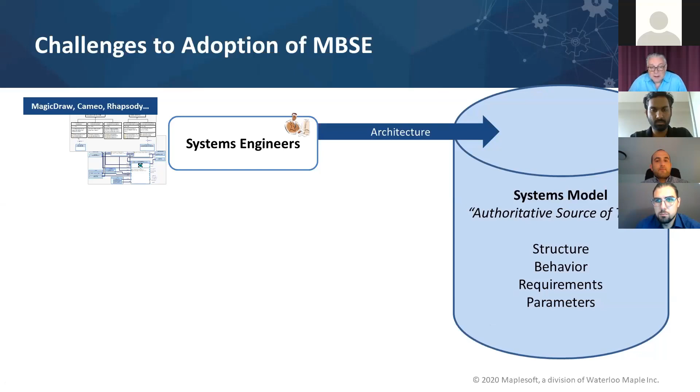And typically, this would be around the systems model, which would be considered either the single source of truth, or the authoritative source of truth, which defines what the goals are of the system design and operation. So the systems engineers would be the ones creating the systems model.

And then many different stakeholders, not just design engineers, but safety engineers, business process managers, all are involved in the project, and they need information from the systems model in order to do the work that they're doing.

And once they got that work, the results of that work has to be then transmitted back to the systems engineer, typically in a fairly ad hoc way.

It'll be emails, documents, spreadsheets, and so forth. And then it's down to the systems engineer to decode all that information, to populate the information back into the systems model. And this is where we're seeing a fair bit of friction.

It's a very human process, so there's a lot of misinterpretations or miscommunications. Errors start to creep in, and this ends up with a lot of time wasting rework or investigations, endless design reviews trying to address those problems.

And then this just sort of erodes not only the efficiency or the efficacy of the process, but also it erodes confidence in the process itself.

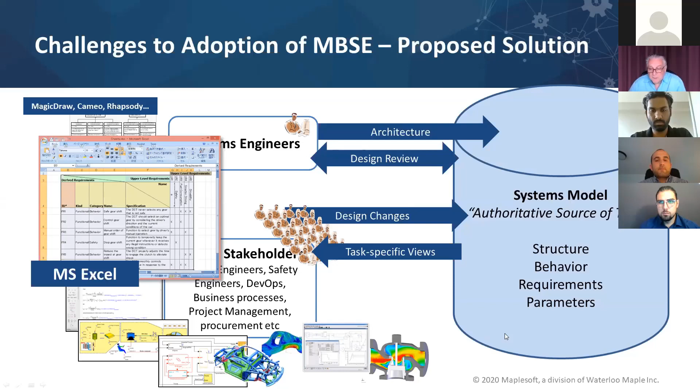And once any changes are discussed and agreed, then the engineer can simply authorize those changes into the main systems model. But this isn't just about facilitating the collaboration between the systems engineers and the stakeholders.

It also allows various different stakeholders to collaborate with each other through the systems model. And this is actually one of the sort of tasks we're going to be seeing here in the context of product line engineering, so variability management, as part of those tasks that can be done in collaboration through the Excel user interface. So that's really our driving motivation for developing MapleMBSE.

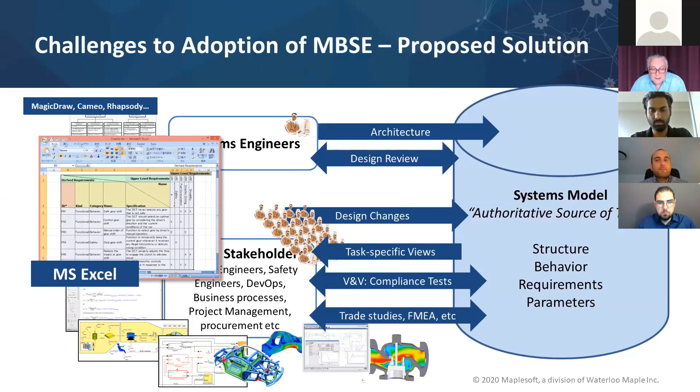Just to be clear, MapleMBSE provides an intuitive Excel user interface that allows you to enter and modify system information in an appropriate way.

But it also, at the back end, provides a very tightly integrated bidirectional synchronization between the systems model and the front end in Excel. So this is not about file import and export. This is truly using Excel as a user interface to the systems model.

It's highly customizable because you have many different tasks, and you'll see in this presentation one example of the tasks that MapleMBSE can be configured to perform. We currently are integrated with pretty much the standard systems engineering platforms, specifically Rhapsody from IBM, MagicDraw, Cameo Systems Modeler through Teamwork Cloud. And as of last week, we also support Capella.

So in a nutshell, what MapleMBSE is doing is facilitating the ability to collaborate across the enterprise through the systems model by making it easier to access that information and to enter information. This reduces friction between the systems engineering function and all other stakeholders, reducing errors, costs, and all that good stuff. More importantly, it helps increase confidence in the process and broadens engagement with all stakeholders through the systems model.

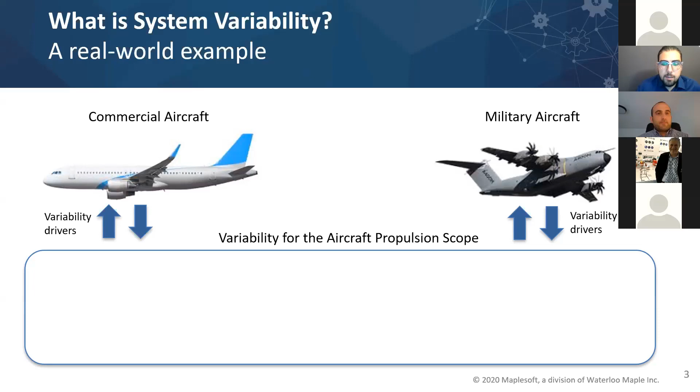If we take the example of a subsystem that can be reused between the two types of products, that can be the propulsion, we can see that the variability is driven by several aspects. For example, the installation of the tanks, whether the tanks are installed in the body of the airplane or in the wings, the type of tanks used, the amount of tanks used, but also the refueling method used to refuel the airplanes and the type of system that implements that.

The type of engine - you can imagine it's really different if you are performing a mission with a military operation scope versus a commercial scope, the engine will be different. Also, the performance of the engine will vary, and the propulsion technology used can also drive variability, among many other aspects. One example is the mileage range, but we can identify other drivers of variability too.

So the key question here is how to manage this system variability, and what is common, what must remain common, and what can be variable.

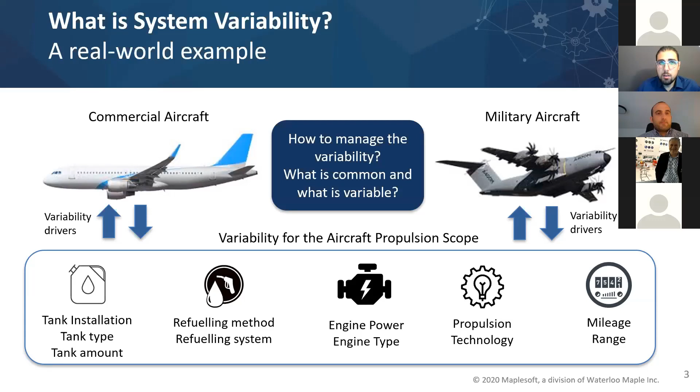If we move to the next slide, now we have the question: why is it important to manage variability? If we take an aerospace perspective, we can identify three main motivations. First is the complexity management aspect. As you can see, aircraft are really complex systems with a lot of interdependencies. Now imagine if you change one component, or add variability in one of these components with so many interdependencies - the impact of changes in your system can be huge. So it's important to understand what must remain common to avoid increasing complexity, and what can vary because it doesn't drastically impact the complexity of the system.

Second aspect is the reuse aspect.

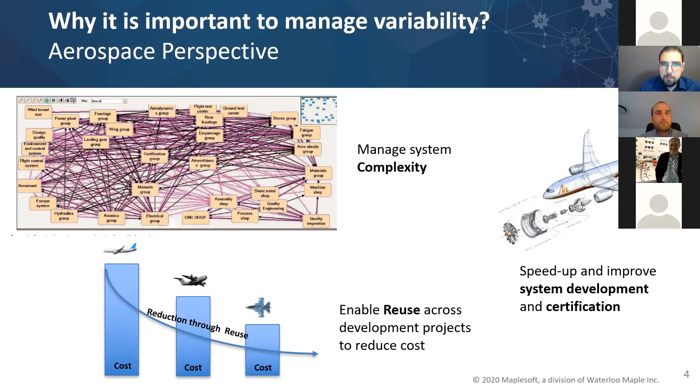As I mentioned before, aircraft manufacturers and other engineering companies aim at reusing as much as possible. Variability management enables the reuse of components, functions, and other engineering artifacts across different projects or programs. You will not only cut the non-recurring costs, but ultimately also the recurring cost, since you are taking advantage of economies of scale. Third, if you manage variability properly, you speed up and improve your system development, so you have a faster time to market, and at the same time decrease the time needed to achieve certification to authorize operation of the airplane in this case. These are just some of the key motivations to manage variability, but we can identify much more than that.

According to the standard, we can simplify the understanding of variability management using this visualization, the so-called four quadrants. On the upper part, from left to right, we have the domain engineering, and on the bottom, the application engineering. Domain engineering is where the variability is defined, created, and managed. Application engineering is where the features and variability are configured in order to generate several applications or single products derived from the platform. So domain engineering is always associated with the platform, where the variability is defined, and application engineering covers the single products derived by the platform.

Now, the focus of this presentation and demo is the left side, so we are going to cover domain and application engineering, specifically the features and configuration of features. For example, take this small example: if configuration 1 has, as you can see here, a commercial operation and a long range operation, I select these two features, and these two features along with the information regarding their variability are defined on this level. At the bottom, they are basically configured.

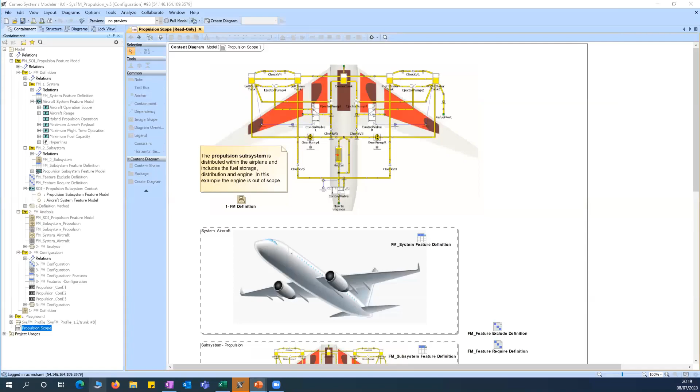It mainly highlights the definition of what methodology means, and clearly states that methodology is a set of processes, methods, tools, and the environment. We extend it here with the ontology and the modeling language, because we find these very crucial parts. It's most important that you take this big picture, and in the following slides we will dive into each one of these components.

With respect to the first part, I'm sure everybody has heard about process and knows what it means. But unfortunately, typical processes are normally historically extended with a lot of information, maybe with methods information or tools, getting so advanced that they are not really usable. From a SysPL, Systems Product Line perspective, here...

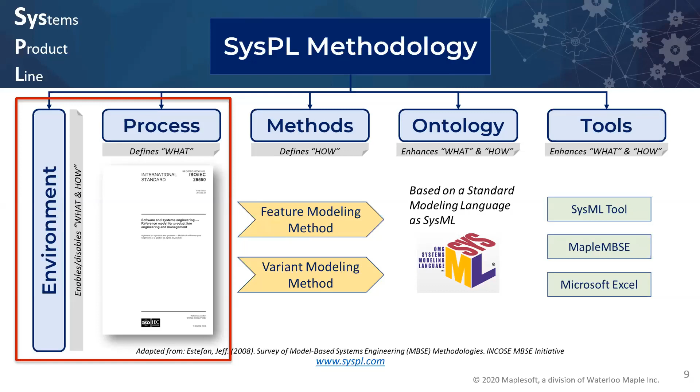If we move to the second part, which is the methods, here it's mainly about defining the how, exactly how you do it. If you meet your colleague or a competitor and you think, oh, you need to know how he did it, that's really the secret. Normally the methods part costs a lot, not only money, but a lot of time to find out how to do it best, how to do it the best way to achieve what's needed with respect to MBSE. The method part is also a very hard part, because it's very linked to the process. We need to look at what we do and then see how to do it from one side, and from the other side, it's very much related to the tool we use. It's also very much related to the ontology or to the modeling language we use.

For this scope, we focus on the feature modeling method, and as you see, it's a task, a collection of other tasks. And if we open the box and see what the subtasks are, it's going to start with...

The feature definition is the time when we start to define features. Here we don't say if it's in Excel or in Cameo, we just say exactly - we're going to show later in the demo how we can do it. We define the feature model elements, which just collect a set of features. Then we define the features of the system under system of interest, and mainly we define the feature relationships, which can be, in the second slide, all the dependencies between the features.

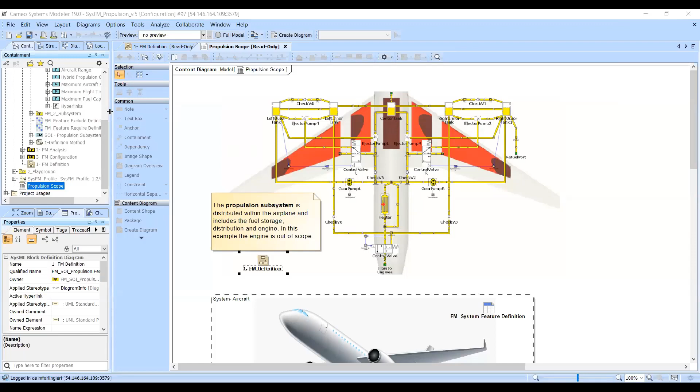So the example is an aircraft propulsion example. The propulsion subsystem for this example includes the fuel storage and distribution subsystem components, but it doesn't include the engine, because we are taking the perspective of the aircraft manufacturer and not of the suppliers.

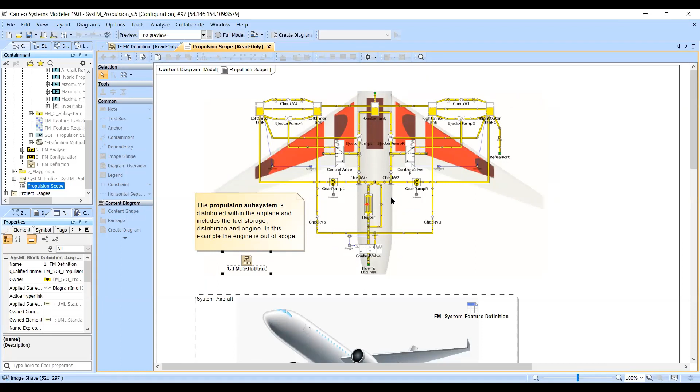Usually the engines are delivered by the suppliers. So when we define the variability for the propulsion, distributed this way as you can see in the airplane, we don't just look at the subsystem propulsion variability, but we need to get input from above, from the aircraft, because the variability at aircraft level is different than the variability at propulsion level. And also we need to get input variability from the components that are usually delivered by the suppliers.

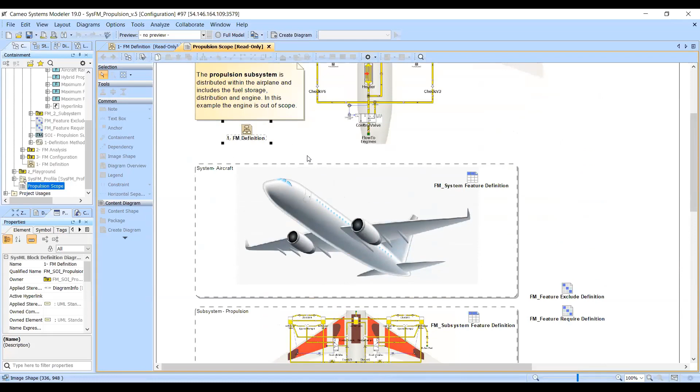For a matter of simplicity, we have identified two feature models for this context. This means that if I want to develop a propulsion subsystem with variability, I will have the features that are under the scope of the propulsion team, defined by the propulsion team. But I also need to consider features defined by other teams, in this case the aircraft team. The propulsion team defines its own features but also uses features from other teams. This approach and organization also enable collaboration between different teams when they define feature models.

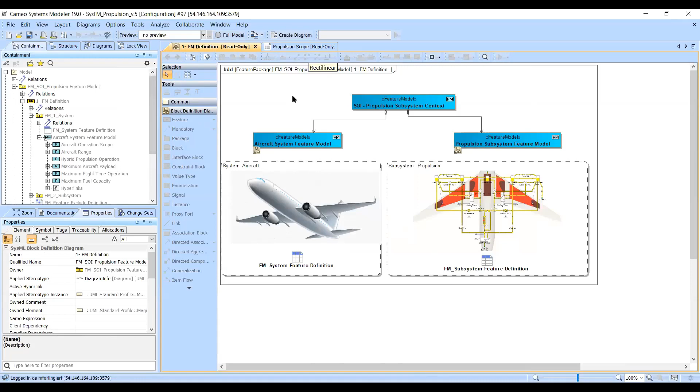So now, after introducing this content, I'm going to show you that some features have already been defined in Excel in the tool. And we have here, for example, the so-called variability tree or feature tree.

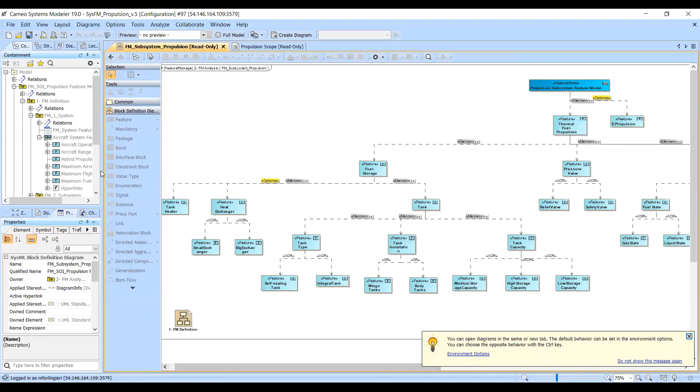As you can see, we have several features defined for the aircraft level: the aircraft range, the maximum fuel capacity, and so on. And then we have other features defined for the propulsion. The variability tree here is much more complex, with many more features. These are the features that have already been defined.

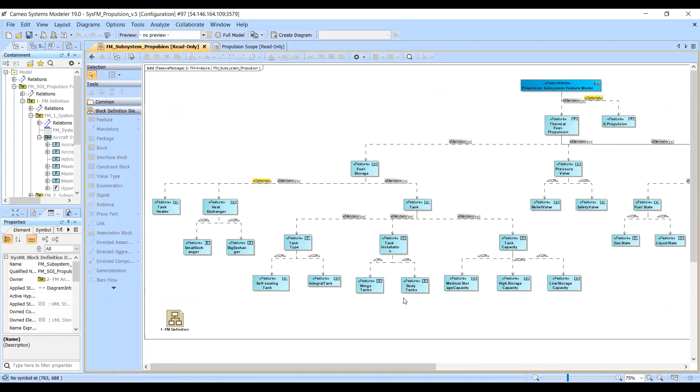So now I take the hat of a person who doesn't know anything about MBSE, but has full and deep knowledge of the system, in this case the propulsion system and the aircraft system. I'm going to go to my system feature hierarchy tab in Excel.

I'm going to add additional features to the features that have already been defined. As you see, these are exactly the features that you saw in Cameo. Now I'm going to define additional features.

What I'm going to define as a feature is called air-to-air refueling. I'm adding this new feature. Air-to-air refueling is basically a feature that enables the refueling of the aircraft in flight, without any turnaround, without the airplane or aircraft having to stop. And now I'm going to add this feature here.

This feature can also be performed in different ways. We usually have two ways: one is called the flying boom, which is the new technology, a faster way of refueling the airplane with another airplane in the air. Then we have the older approach called probe and drogue for refueling the airplane. This approach is actually more used when there is an existing product where this needs to be integrated, after adapting these features for air-to-air refueling.

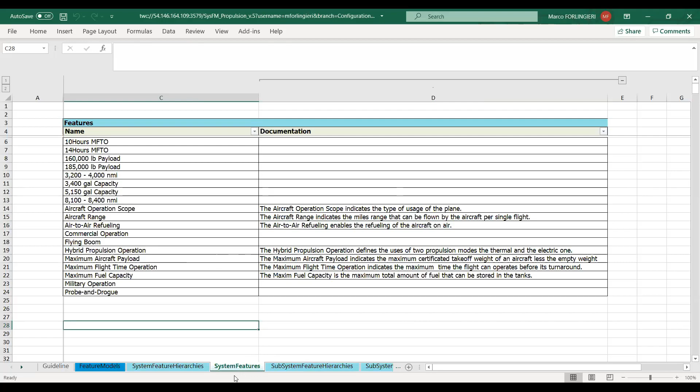So after defining the features and the hierarchy of my features, I can now go define the variability information of my features. So I go to system feature variability, and here I will add one piece of information: the new feature, air-to-air refueling, is optional for the aircraft.

As you can see, not all aircraft have this feature, but just some of them, especially military aircraft. Okay, and that's why I'm going to add this here. This is optional — air-to-air refueling is optional for the aircraft system feature model.

Now, we should also add here the information about the XOR, about the two features that are under air-to-air refueling: the flying boom and the probe and drogue. But in this case, I'm not going to add this information, because I will pretend that I, as a system expert, forgot to add this information.

So I will continue now with my example, and after I've defined my features, I will start to add additional information. As I said before, not all the airplanes have air-to-air refueling, so I start to define some constraints. I know for sure that air-to-air refueling cannot be implemented in commercial operation, in commercial airplane. Why? For safety reasons, because you are carrying passengers, and it is not allowed to have air-to-air refueling for commercial operation. That's why I'm going to say here that air-to-air refueling excludes commercial operation.

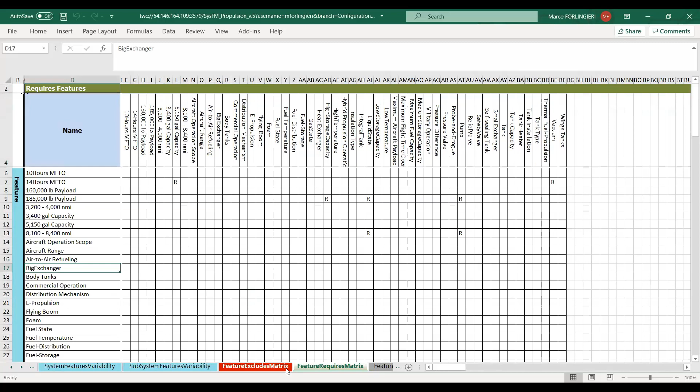Now, in this case, I also know that there is another constraint called required constraints. So before was the exclude, now is the required. And if I now put the head of the propulsion expert on, the propulsion expert, who doesn't have any knowledge about MBSE, sees that a new feature, air-to-air refueling, had been added. And he can say, okay, I know as an expert that if I have this feature, I require the body tanks at propulsion level. Why? Because to facilitate the collection and storage of the fuel. That's why I say here that body tanks are required from air-to-air refueling.

So at the moment I added my information, I'm going to save. I added what I want to save. I'm going to commit. I'm saying new feature added. And then I'm now handing over to Mohammed.

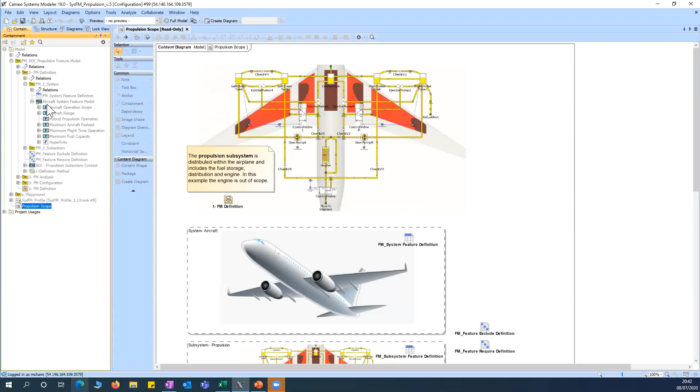Let me double check. Okay, I'm doing my system engineering job. I just got information that a new feature was added. Marco, did you add it under the?

Yes, it's added, as you can see. Okay, I will check my Excel side, so just to be sure. I will save again. Okay, yeah. Okay, just try maybe to save and commit. Did you add a comment as well? Yes, I do it again.

So I edit. Okay. Then reload the project. Yeah, so now we see, maybe it's just a commit, but I can see now that air-to-air refueling is added. That's what I got information from Marco. And now I'm doing my system engineering job, doing really this holistic functional analysis step.

So part of the things, first I'm going to lock the element. I cannot now change anything. I'm interested to lock exactly for the system level. And I'm also interested to lock this diagram to do my analysis.

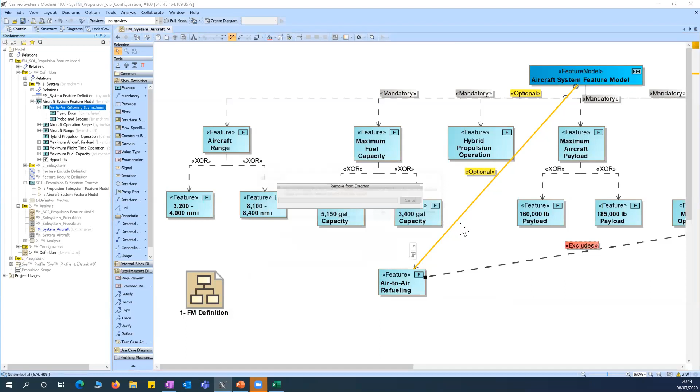Here I see two relations. One of them is the containment, which I know already: air-to-air refueling is hierarchically under the aircraft system. I don't want to see it on this diagram. I'm definitely interested in the optional part. So perfect, I can just quickly change the layout.

Okay, I come back to the features now on the other side here, and I directly identify the mistake, which was faked by Marco, is that it's hierarchically correct, but we are lacking the XOR information, because as system engineer, I can go back to the requirements database, and I definitely know that we cannot put both. We have to pick one of these options. So as a system engineer, I have the power to do so, and I just directly add the XOR because I'm sure about it.

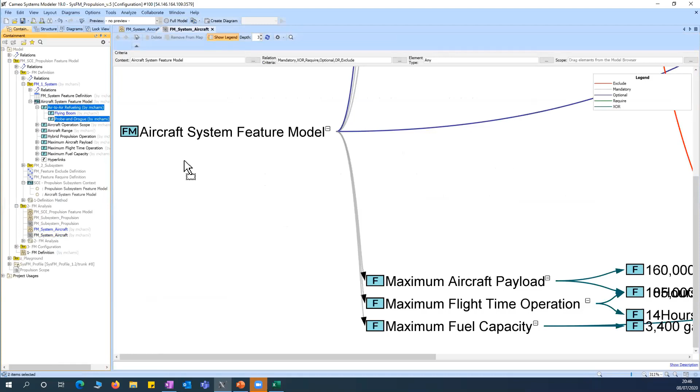I'm not interested in the aircraft, I want to see more information only to air. And then here I can dive and see, oh, there is more information. So this is what I added now. You can see air-to-air refueling, and the relationship here in dark green are actually the XOR. It's not the container, it's only the logical, which we saw in the ontology.

I can see that, okay, Marco added 2 additional requirements. I definitely can go to the properties window and also see more information for the traceability, where it's selected, all this stuff. But this we're going to see in the second use case. So for now, I did my job mainly by identifying the lack of XOR.

I would like now to commit that, save it to the server. So I'm generating now from 100 the new version, 101, and I'm going to say added XOR relationship, fueling feature. And I will make a comment. I decided to leave everything free, so I don't lock anything else. And now I will hand over to Marco, where we expect to see this XOR missing added.

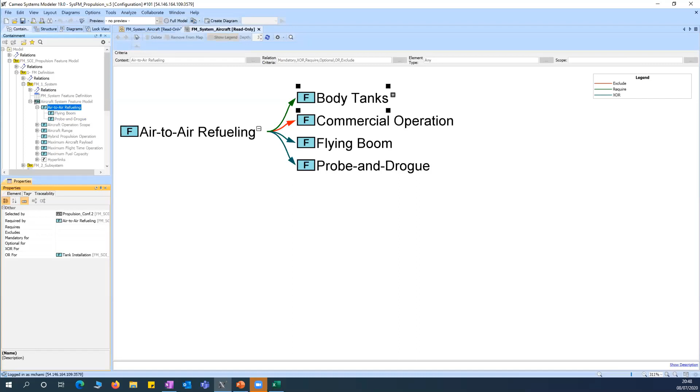So yes, so now I'm going to open the Excel and see the changes. So let me share. You stop sharing, Mohammed? Yes. Okay. No.

So now I'm going to reload the projects. Exactly. If we see now what will happen in the has XOR row column, sorry - we don't have, you see, you don't have any information here for the XOR.

Now I'm going to reload. You tell me that something has changed. And now it's loading. So now I expect to see, we should have under air-to-air refueling here. I should have. Marco, we're not seeing the Excel file. Okay.

Yeah, no. Okay, it was a connection problem. Can you see now? Yeah, we are seeing now. So now you see we have under air-to-air refueling, now the flying boom and probe and drogue have been added.

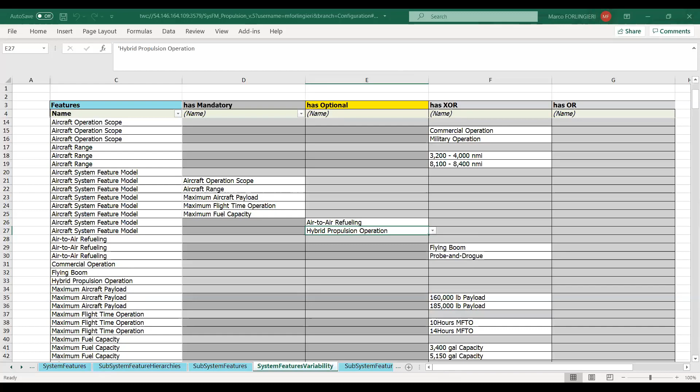Okay, so the second use case, I don't know if we have time because we are running out of time. I'm going to quickly introduce it. So before we just covered the variability aspect, the domain engineering aspect. Now we are going to cover, our idea was to define the feature configuration, always as non-MBSE.

So in this case, it would be the sales expert that defines the feature configuration. In the spreadsheet, in Excel, he will select the features that are needed according to customer requirements for the specific configuration, then it will save. And then MBSE, as it did before, analyzes and eventually updates the selection for the configuration. So this is the second user story, a similar approach, just the scope is changing, not the domain engineering, but in this case, application engineering is the configuration aspect. So I'm going to do it quickly.

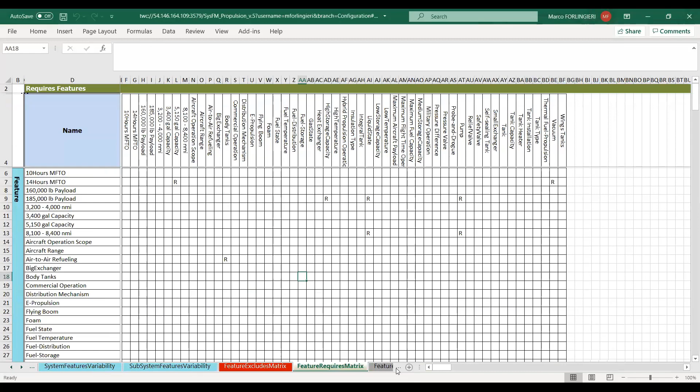So now I go to the configuration aspect in my tabs. Here I have configuration. I'm going to add a new configuration, called configuration 4. And then I will have now this configuration here. And this configuration I know is a military product, and it's going to be really the same as configuration 1.

So I'm going to copy here, let's say, the features that are needed. Plus, I'm going to add here the air-to-air refueling that is needed in this configuration, and I'm going to add the flying boom as a feature. So after I define the features for my configuration, I commit again.

Okay, thanks, Marco. Then I will share my screen. And now, as you see, I get also notified that a new version of the server, and I expect, now we know it, but I expect the configuration 4 to show up here when I make the update.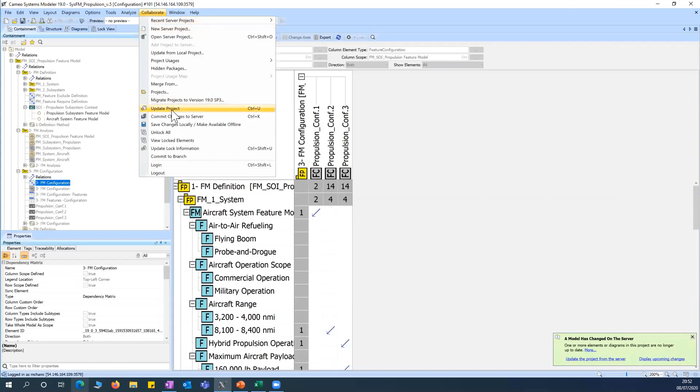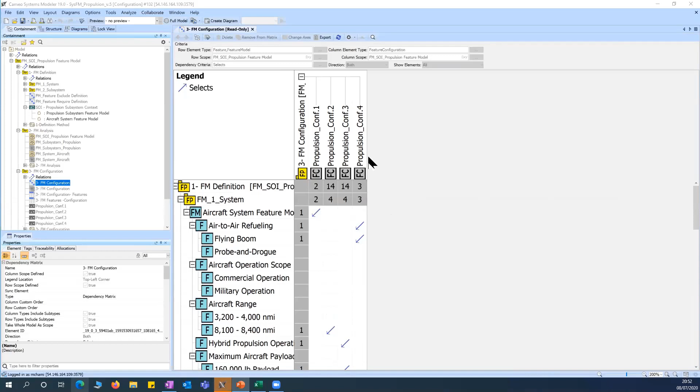So configuration 4 is there. I know it's always still about the air-to-air refueling. What I'm interested now again to analyze is the systems engineering hat. I'm going to check all this, my to-do list, what to check everything. And now mainly I'm interested about more because of the configuration. It's not only XOR and OR logic like before, it's definitely excludes and requires.

What I'm showing now could be also executed using Cameo validation rules, but it's out of the scope of this webinar today. So I go to air fueling very quickly, and I see that, okay, it requires the body tank.

I know that the body tank is another here, and I can see here, if I highlight this part, it's not yet selected. So this is actually an issue here, because if we selected air-to-air refueling, and air-to-air refueling requires body tank, and we are not now selecting that, so this is an issue.

But I cannot just select it without checking, so I have to go to body tanks actually. And body tanks, I can see it's an OR for the tank installation. So OR tells me that, okay, I can take for a particular configuration, both options, body tank and wing tank together. For sure, I have to go back to the requirements and analyze it, or talk with the tanks experts for that. But at the end, finally, I know now, and I know we have to select it because that's why requires is there.

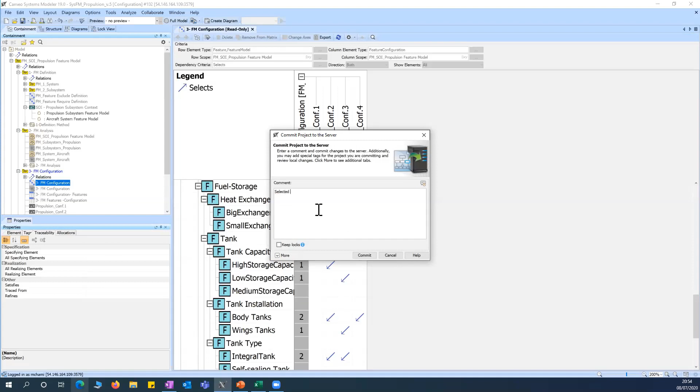Okay, selected body tanks for config 4, and we expect now again, I give back to Marco very quickly that we see that even this selection of the configuration will pop up by Marco. So okay.

We have now, I think we can go now to the presentation back. Back to me? No, just last point quickly. So he's updating me that the model has been changed on the server. So of course the information Mohammed added are now implemented out in the spreadsheet.

Now let's quickly look at the few use cases where this approach can be used. So first, I would say when you have to collect variability information from different stakeholders that don't have any understanding and knowledge of modeling methods and tools, it will be more efficient because you don't have to train them on MBSE and so on.

The second use case is if you want to be closer to the system expert, because they already use spreadsheets and Excel. I saw many times the use of that, and they are really reluctant and have resistance using modeling tools. That's why if we bring the spreadsheets, we also increase the acceptance of the variability management solution.

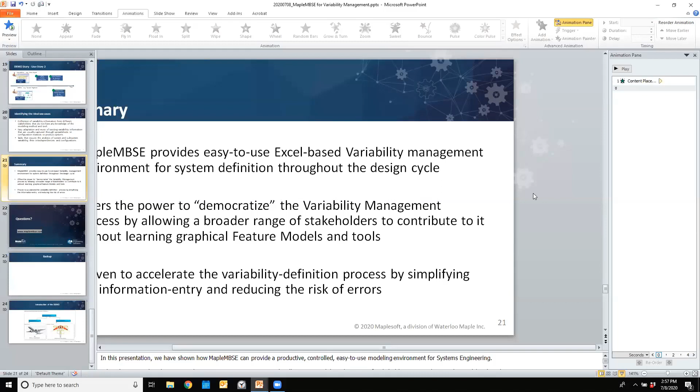Okay, so let's just wrap up. Really, just to summarize what you've seen here. In fact, and thank you very much, guys. That was a really interesting use case of the tool, and you can see some real advantages for doing that.

Just to summarize, MapleMBSE is providing an easy to use Excel front end for many different tasks, in this particular case for variability management throughout the design cycle. Our goal with the tool is to really democratize any of these tasks, including variability management, and to engage a broader range of stakeholders in the systems engineering process, without having to learn tools like Cameo and/or Rhapsody for doing that.

And we've seen from today, and certainly we have other case studies that have shown that the use of an Excel-based front end for doing a lot of this kind of work has proven to accelerate the variability definition process by simplifying the information entry and reducing the risk of errors.